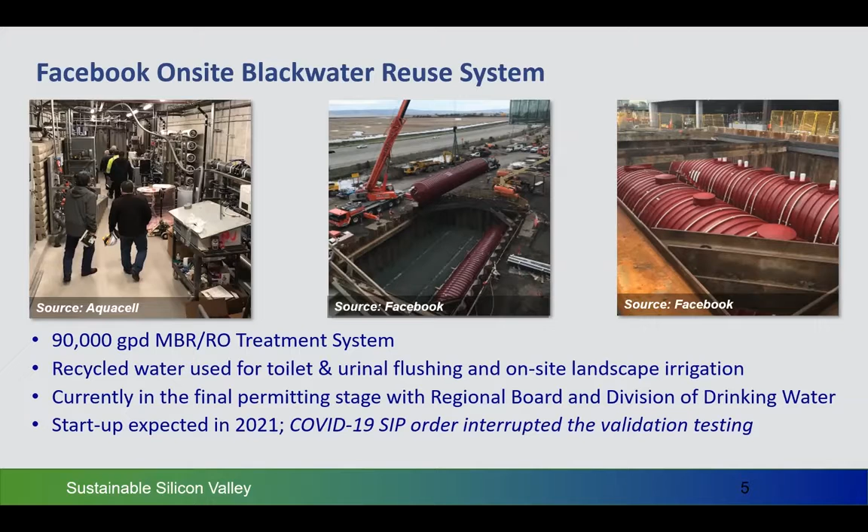I wanted to also illustrate the flow through this system. The wastewater comes from these two buildings, flows into the on-site reuse treatment plant, and about 68,000 gallons per day of recycled water is produced for on-site irrigation and toilet flushing.

The system also discharges a waste stream, which has to go somewhere, and in this case, back to the West Bay system. It includes a brine stream from the reverse osmosis process, because the salts become concentrated. There's waste sludge from the biological treatment process, and screenings, which come from things like wipes that get down into the sewer system, and that all has to be removed and go somewhere.

As I mentioned, when people are working on the design of these on-site systems, the waste discharge component can end up becoming a bit of an afterthought, because we're so focused on the water reuse component and all the LEED, green benefits and everything of these systems, that it can be overlooked in the early stages of development.

Also a point to note is that the waste streams from these treatment plants are different from the municipal sewage you'd find out in the public sewers, in that they are very concentrated, with high suspended solids, and in this case, high salinity and TDS due to the brine discharge. So they need to be looked at differently.

The other thing I'll share with you is that every sewer system is really unique, and some have more assimilative capacity than others, and some don't. You really don't know until you've evaluated the specific discharge and the point of discharge and taken a look at that. So that's why these need a permit.

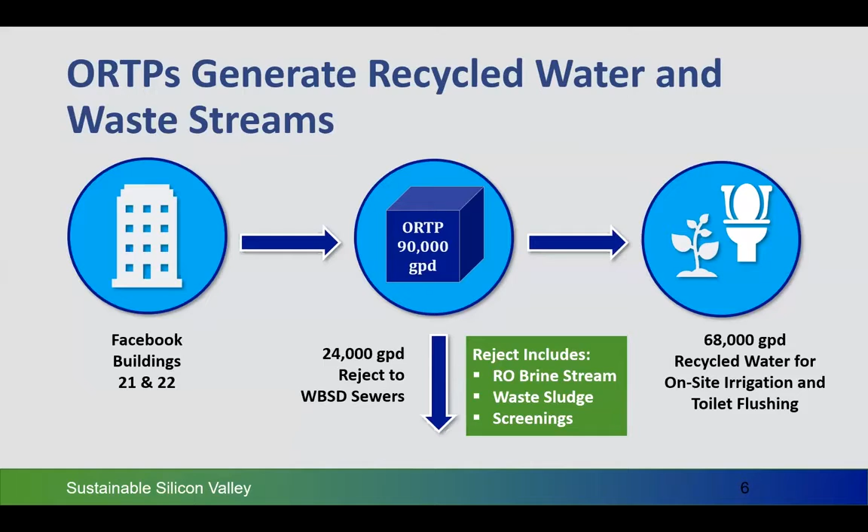West Bay had two main permitting concerns regarding the discharge. The first was salinity. West Bay was concerned about the high TDS because they are developing their own local recycled water system for the Bayfront area. They're going to be building their own recycled water treatment plant, which is going to be great. So it's important for them to also control the salinity, or salts, in the wastewater as well.

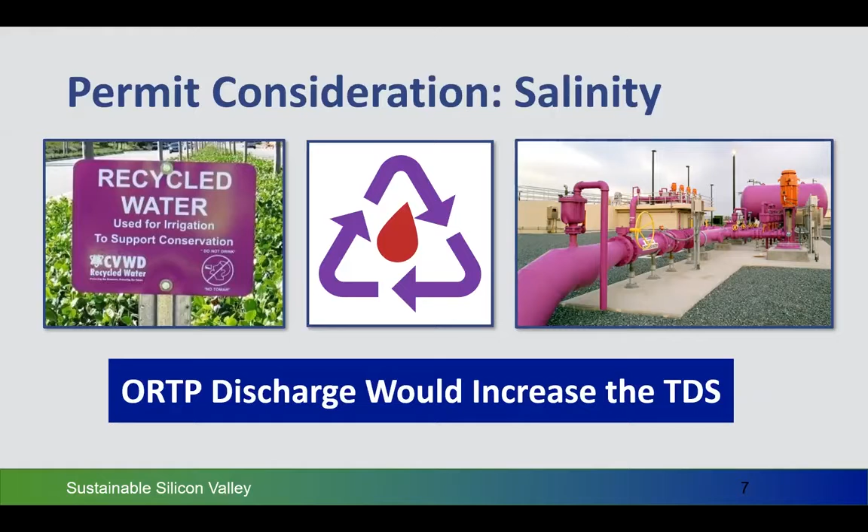Just like we know that too much salt is bad for plants, it's the same thing here. Also, independent of the recycled water concerns, high TDS in the discharge could potentially impact the downstream wastewater treatment plant, which is operated by Silicon Valley Clean Water, and that had to be evaluated as well. That's where the wastewater flows, by the way, from the West Bay system, to the Silicon Valley plant.

This illustrates with the numbers why TDS is a concern. The rule of thumb is you want your salinity for your irrigation water to be down around 450, or less than 450, to protect plants and landscaping. West Bay's average wastewater is already a bit elevated at 700 in their trunk line. And Facebook's discharge, which is a concentrated waste stream, is about 2,800 milligrams per liter of TDS.

In the future, with more of these systems coming online, you could imagine one may not necessarily be an issue, but if there's lots of them, then this needs to be looked at. Especially if the salt's being concentrated, it goes back into the wastewater system and has to be treated, or could increase the salinity of recycled water produced.

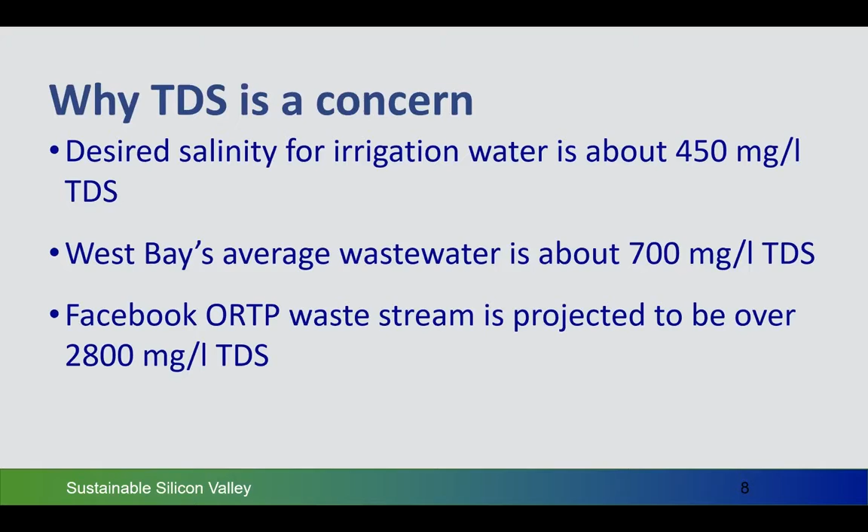A second concern is the impact of the concentrated solids and screenings on the sewer collection system. You can see in the middle here some pictures of pipes. Sometimes sewer lines get dips and sags, and solids that get into the system can collect there, leading to potential plugging or clogging of downstream pumps. That could lead to additional cleaning costs and maintenance expenses.

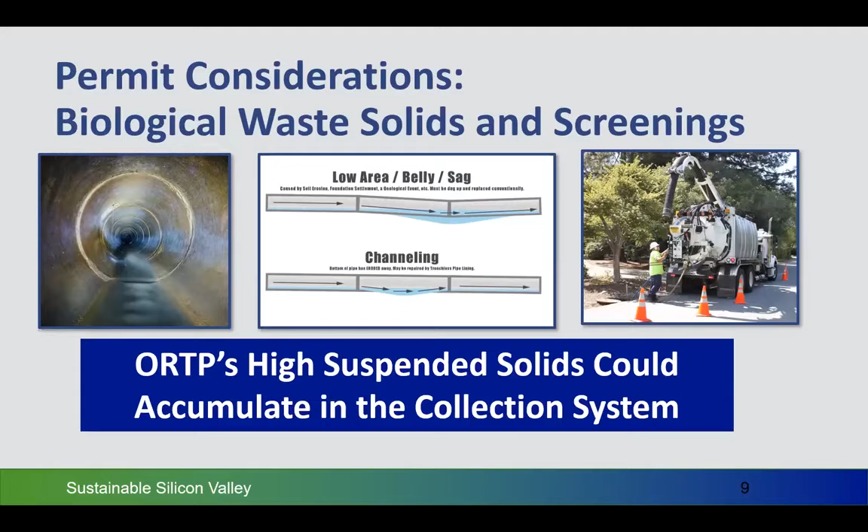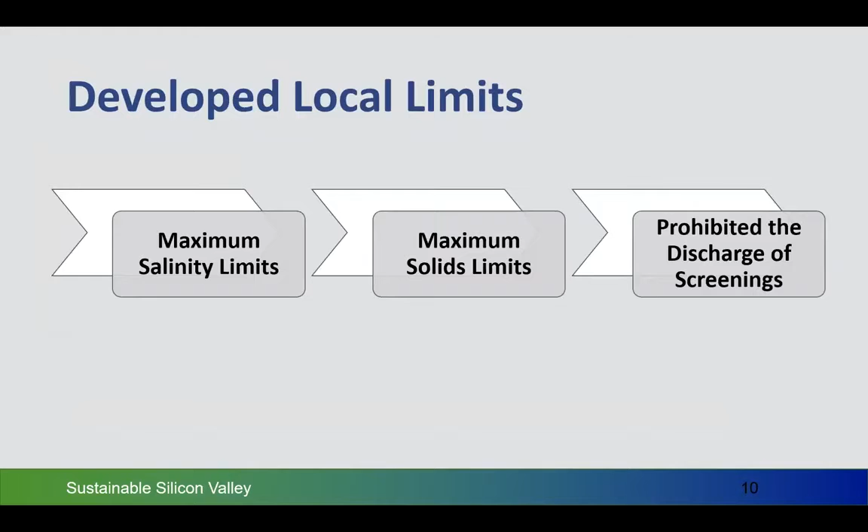So these were the two concerns: salinity and the biological solids. As a result, local limits were developed to protect the sewer system and the downstream wastewater treatment plant at Silicon Valley Clean Water. These limits included salinity and solids limits that would also prohibit the discharge of screenings.

The issue with that is these limits would require modifying Facebook's treatment system, which they had already started constructing, to meet the proposed more restrictive TDS limits and prohibit discharge of screenings. To do that, they would have had to install new process equipment and haul the screenings offsite for disposal at a landfill, which would be both expensive and disruptive, and additional costs that weren't included in Facebook's plans.

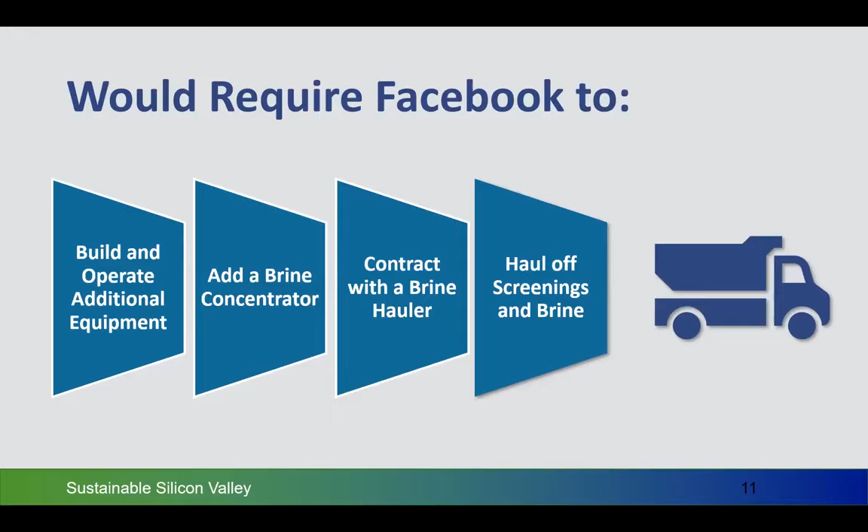As a result, the permit as originally proposed would create significant additional capital and operating costs for Facebook that weren't previously budgeted.

But there is a silver lining to the story. With all these issues at hand, the creative and problem-solving minds at West Bay and Facebook got together and came up with a novel permitting approach that was able to move the project forward. With that background, I want to turn it over to Phil Scott at this time to tell you more about the permitting approach and some of the lessons learned.

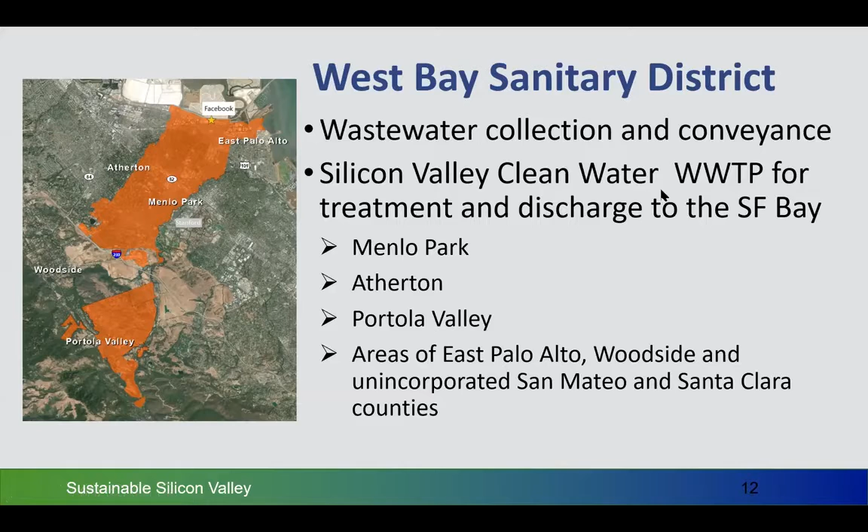So we were concerned about the salinity, like Don said. We were worried about the screenings. So what we ended up doing is working with them on a provisional permit that would allow a couple of variances to the screening requirement, as well as the salinity requirement. Over a period of 3 months, the provisional permit would be good for 3 months, and we would review it every 3 months and look at the data to see what their discharge is as far as salinity and the screenings, and also give us an opportunity to assess the downstream sewer line to see if the screenings are having any negative impact on loading of our sewer line going to the treatment plant, going to the pump station that then pumped it to the treatment plant.

So we were able to come up with this approach for Facebook because it's a new type of discharge. It's not routine. If we can go to the next slide there, Don.

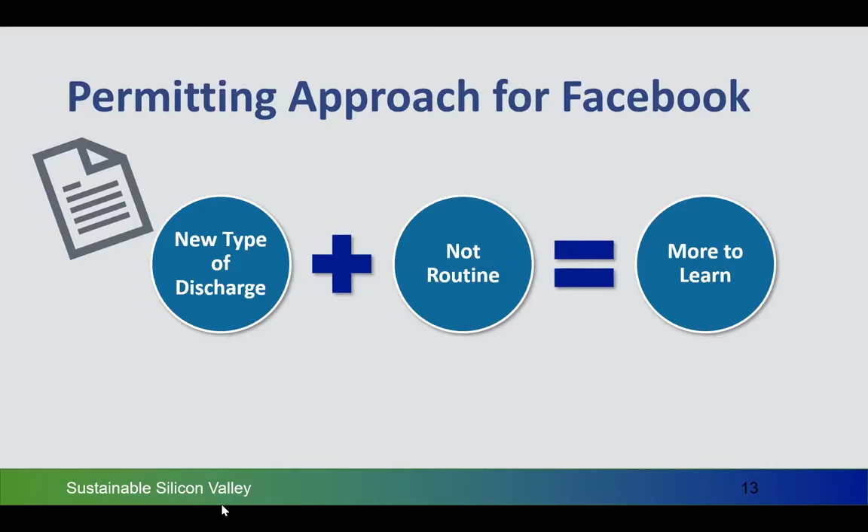Okay, why are we not... it's not moving. Yes, mine is up. There you go. There we go.

So as I mentioned, every 90 days we review the permit and see if conditions need to change, or if we need to stop the provisional permit, or if after enough data is collected, maybe we can continue on with the variance to the permit and issue a final permit at a later date. Next slide, please.

So the next steps for the Facebook project are they need to have the Regional Water Quality Control Board approve their on-site reuse treatment plant so they can become operational. And the COVID, as Don mentioned, kind of delayed some of that work. Then they'll be collecting water quality data and flow rate data for us.

Additionally, we had them install flow monitors that we can monitor through a website, so that we could have real-time flow information as well. They'll be submitting quarterly reports so we could look at the data, and then after 6 months we review the permit conditions and see where we need to go from that point.

Of course, they haven't started yet, so the commissioning and final permit we're expecting sometime in 2021. I'd tell you June, but I'd probably be wrong. Who knows how things are going to go for the next 6 to 9 months here as we're dealing with this COVID. Next slide there, Don, please.

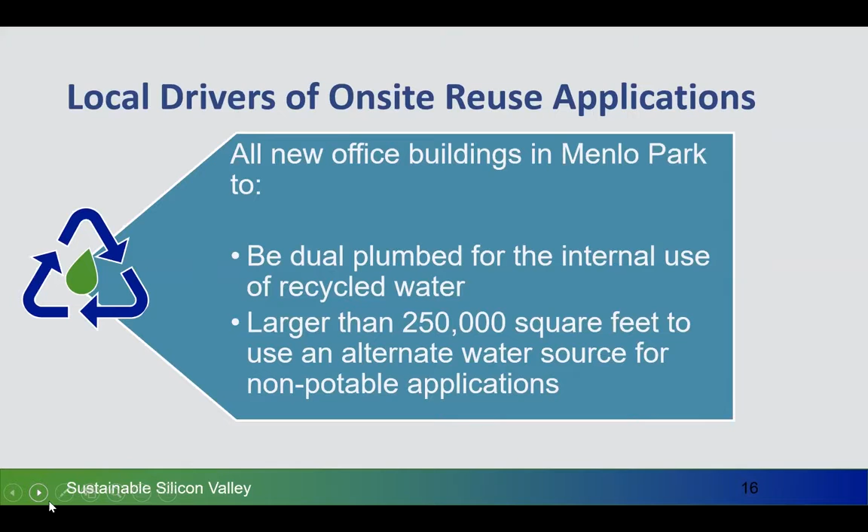So the biggest local driver for the on-site reuse application was the city of Menlo Park had asked that all buildings over 250,000 square feet use an alternate water source for non-potable applications. At that point, when they were designing the buildings, we didn't have a viable project online for recycled water in that area. The buildings were also required to be dual plumbed for internal use of recycled water. So Facebook decided to go ahead and move forward with the on-site reuse treatment plant. We did gain some valuable lessons from this permit application, but let's move on to the next slide, please.

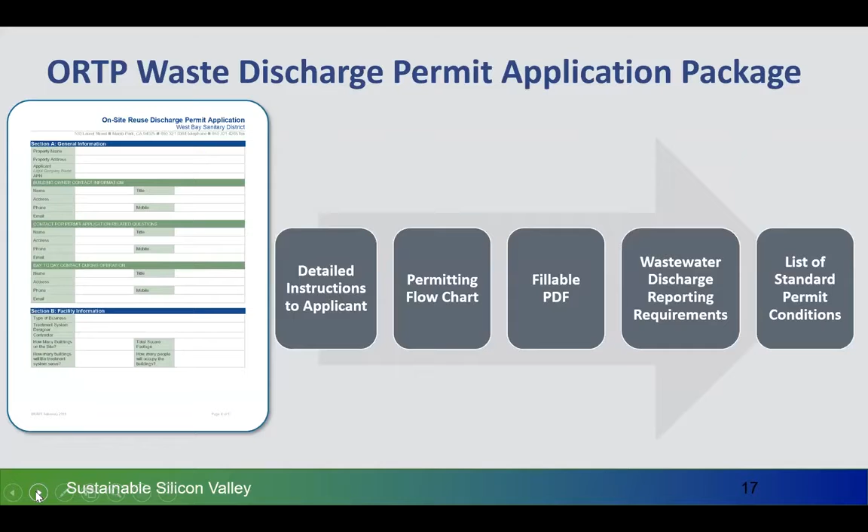One of the outcomes of this whole process is we had West Yost help us put together an on-site reuse treatment plant waste discharge permit application, because we had permit applications for many different things, but not for an on-site reuse treatment plant. So we were able to come up with a very comprehensive permit application that staff can use, that the permittee can use, and it'll help us out for not only this application, but for future applications.

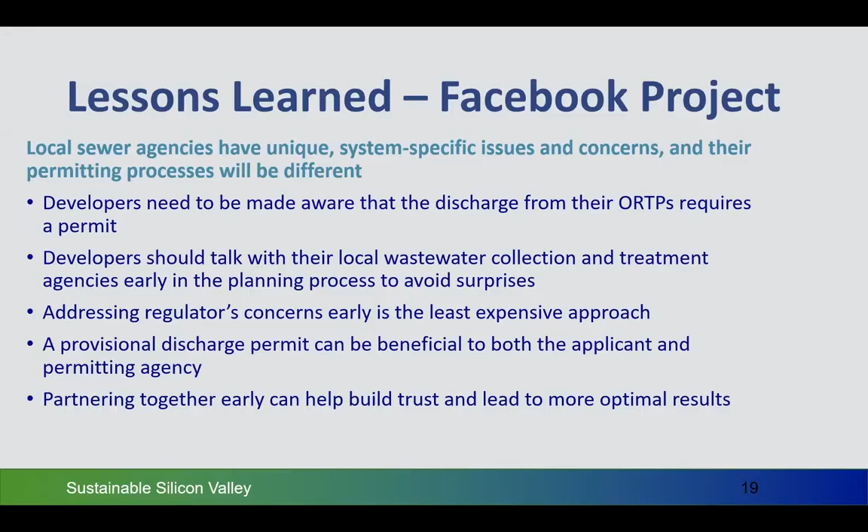So if that's it for this one, we're going to move on to the Sharon Heights talk, which Phil is going to present. I'm going to stop sharing. You got it, Dennis? I got it.

The Sharon Heights Golf and Country Club recycled water treatment plant is a little bit of a different story, in that we were trying to intercept wastewater up the hill and not pump it all the way down the hill, and provide the golf course recycled water that they could use in lieu of potable Hetch Hetchy water. They had a need to find a sustainable source of water in case there are droughts in the future, which we know in California there will be.

They were thinking that someday some governor's not going to let them use potable water for irrigating their golf course, and they wanted to be able to sustain their golf course. So we spoke with them and came up with a partnership, really, on putting together a treatment plant on their site that would intercept wastewater coming down the hill and recycle it for irrigation of their golf course. Next slide, please.

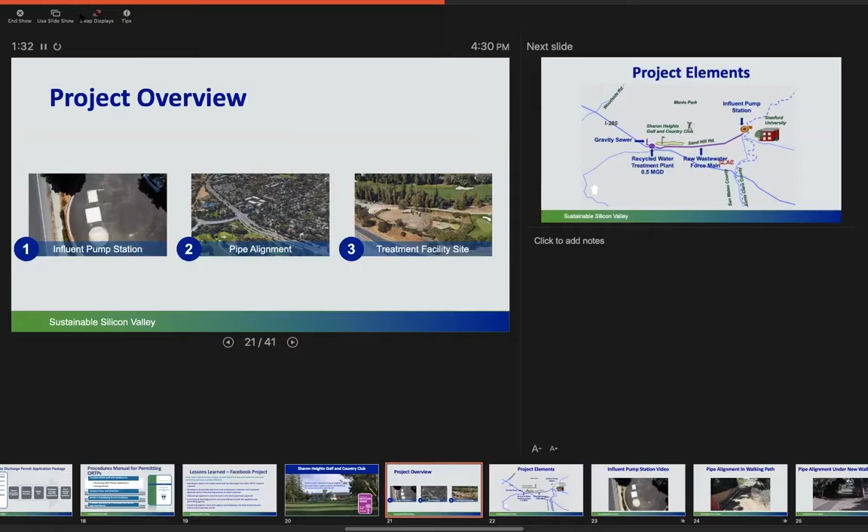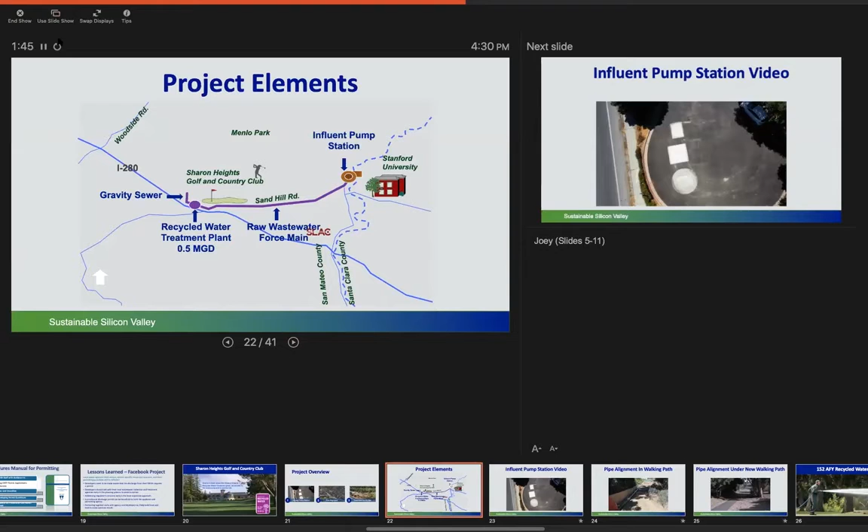The next slide shows these project elements in a map view. You can see the treatment plant on the left, where the recycled water treatment plant is about half an MGD in size, and it's located on the golf course. They're next to Sand Hill Road, bounded on one side by Sand Hill Road and another side by I-280. The influent pump station on the right takes the raw wastewater I mentioned and pumps it almost 2 miles up to the Sharon Heights Golf and Country Club treatment plant through the purple force main that's there along Sand Hill Road.

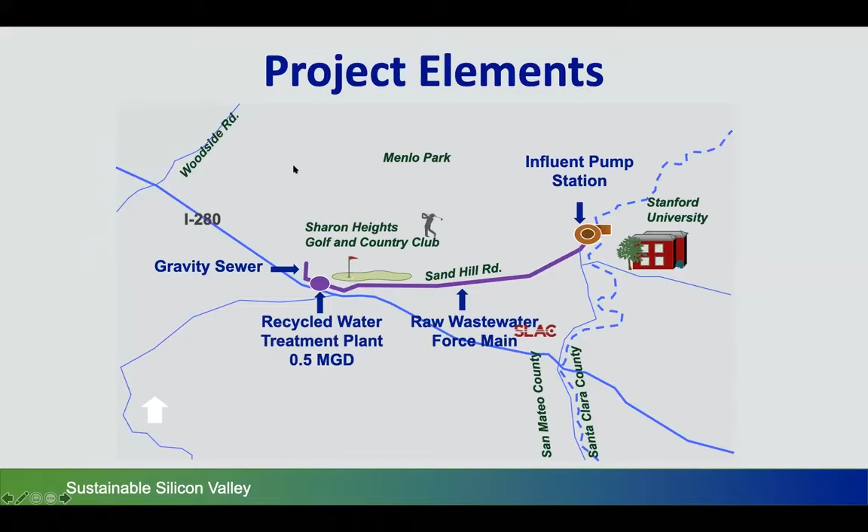The original project and encroachment permit that was applied for through the city of Menlo Park was to install the force main on Sand Hill Road. But on the next slide, we'll talk a little bit about the pump station, and we'll get back to the force main. But one of the neat things about this project, we did some drone videos, and I don't know if this will play here, but this is a quick little snippet.

But you can see the pump station is below grade, and all you see from the street is the vaults. And there is a control panel there on the side street island, not on the main street island, that we've since installed some shrubbery and painted it green to make it less visible and improve the aesthetics for the neighbors there. The nice thing about having the pump station underground is it didn't cause any problems with the street for the neighbors or parking.

The pump station consists of two 35 horsepower pumps and only needs one, but there's two so that it can have redundancy. But there is 265 feet of head that we need to overcome going up the hill. Yeah, and the next slide there shows the pipe alignment.

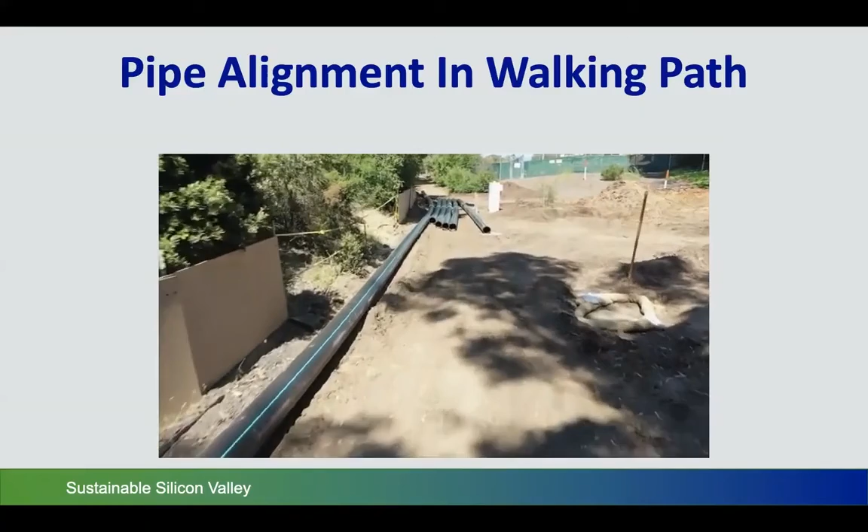So we had moved through the design build process that we were involved with. The value engineering portion of that really paid off in moving that pipeline out of Sand Hill Road and onto the walking path. There's a walking path that's parallel with Sand Hill Road. It is roughly the path we wanted to follow to get our raw wastewater pumped from downhill up to the top of the hill where the treatment plant was. By doing that, it took the impact of the construction off the traffic on Sand Hill Road.

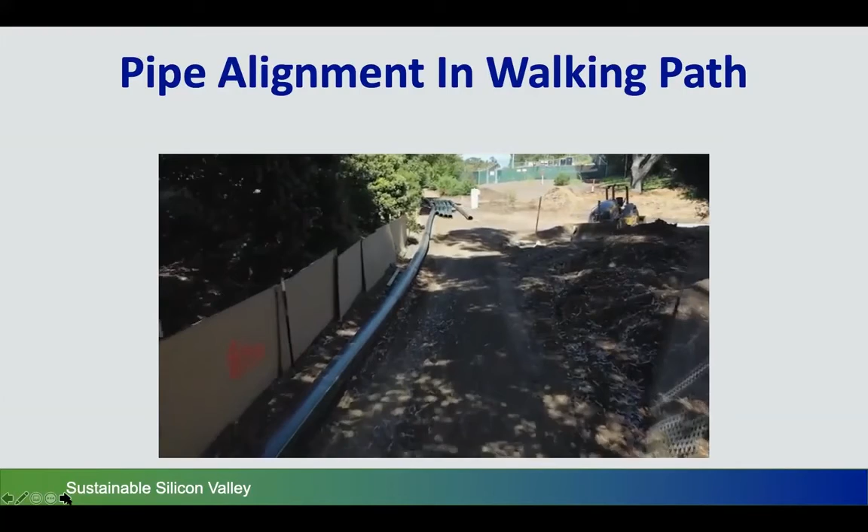And if we go to the next slide there, it also improved the walking path. The walking path was old and needed some repairs. And by us putting the pipeline there, we reconstructed the walking path, and it looks really nice. And it came out to be a benefit for the whole public and the project. And the city was delighted to mitigate the impact of the traffic.

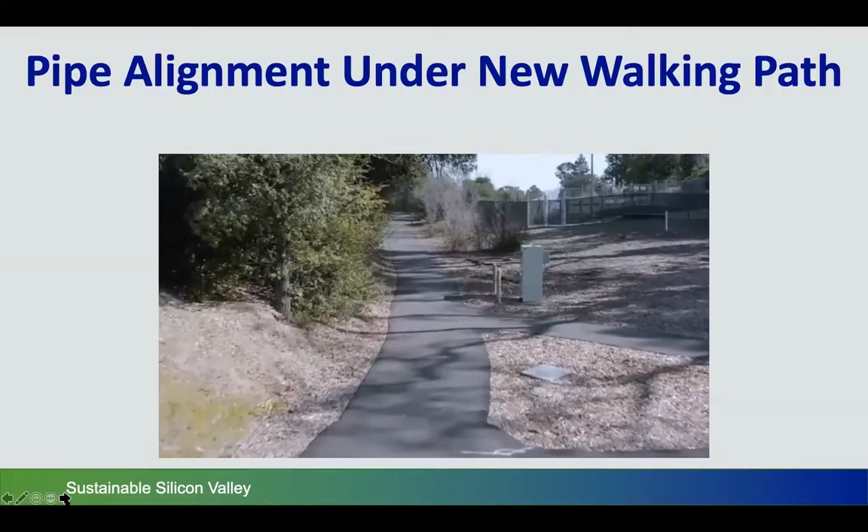All right, then the next slide just is a nice picture of recycled water being put on a golf course. So there's 50 million gallons a year that we're expecting to be able to produce with this recycled water plant. And we're targeting 400,000 gallons a day for the irrigation of the golf course during the summer. They actually use a little bit more than that, but we're pressed to get any more wastewater to be able to turn into recycled water in that area.

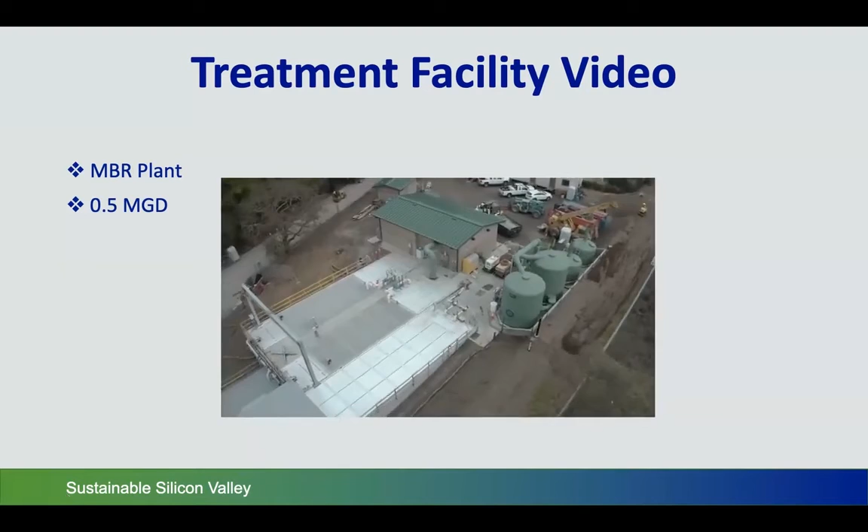But the treatment facility here is a membrane bioreactor plant, and we were able to use the slope of the location to produce a forward feed to reduce the reliance on pumping the wastewater from one process to another. We were able to use gravity. That helped reduce how many pumps we had to have, how much electricity we use. And again, as I mentioned, it's a 500,000 gallon plant. Turned out to be quiet and odorless, and actually pretty well screened from the golf course, especially with all those trees on the right side. We'll talk more about that.

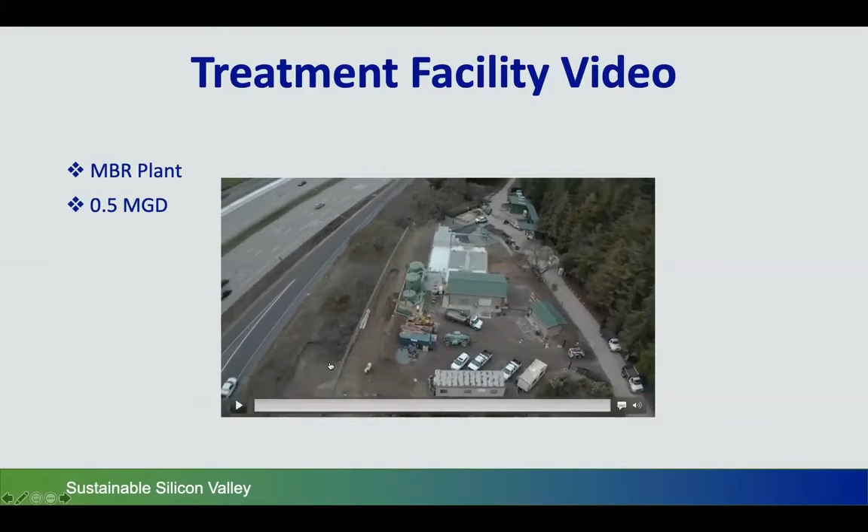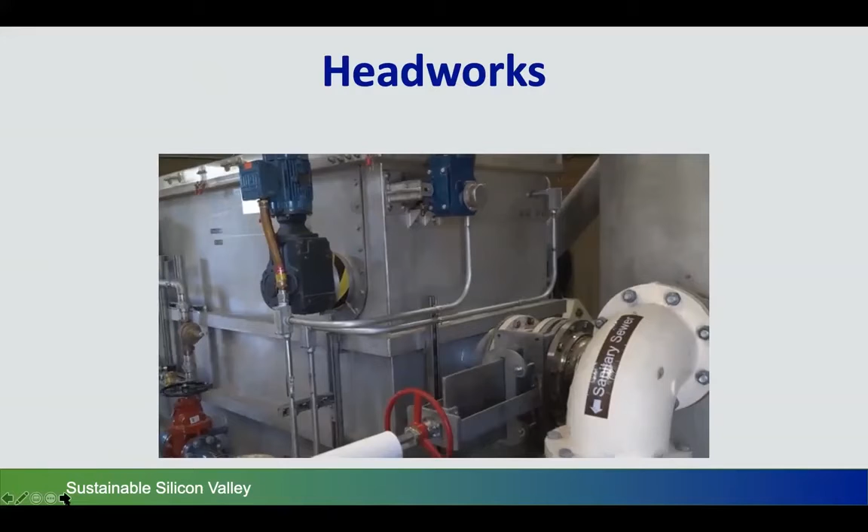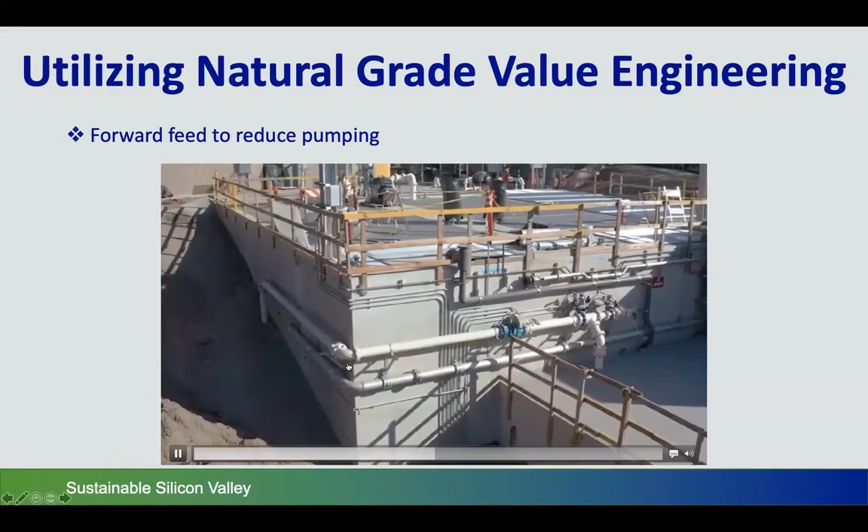The next slide shows the headworks where the raw wastewater enters the treatment plant. It's just a real quick video, but we also learned to use some of these videos from inside for training purposes for our chief plant operator. The next slide will show a little bit more detail about the slope. You could see the slope coming down there on the left side of the facility. And that helped us, as I mentioned, to be able to use the forward feed to reduce the pumping. So that was one of the benefits of value engineering in the design build project.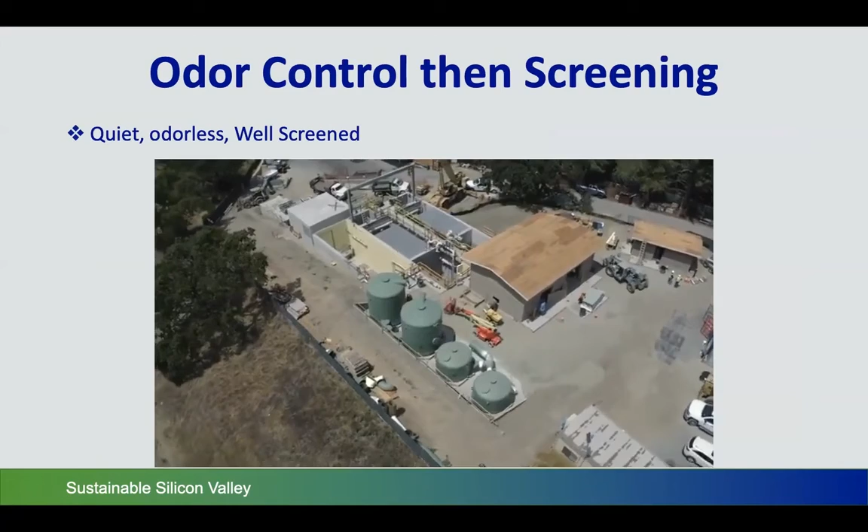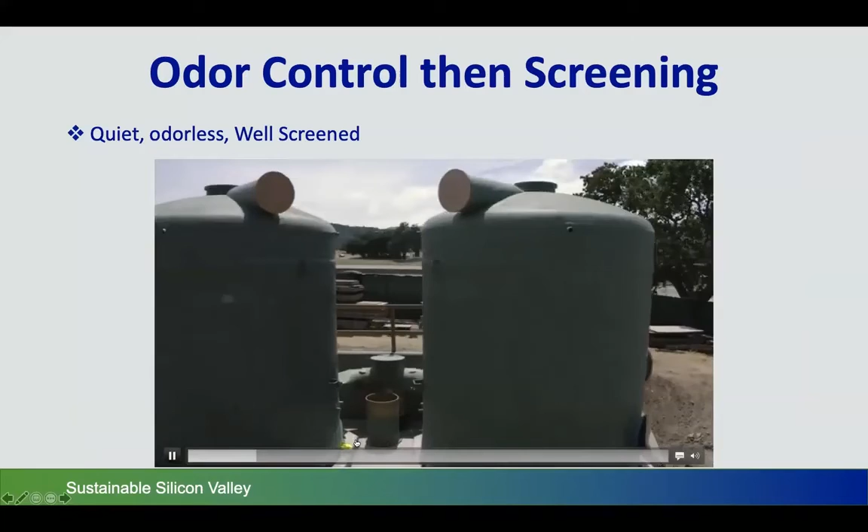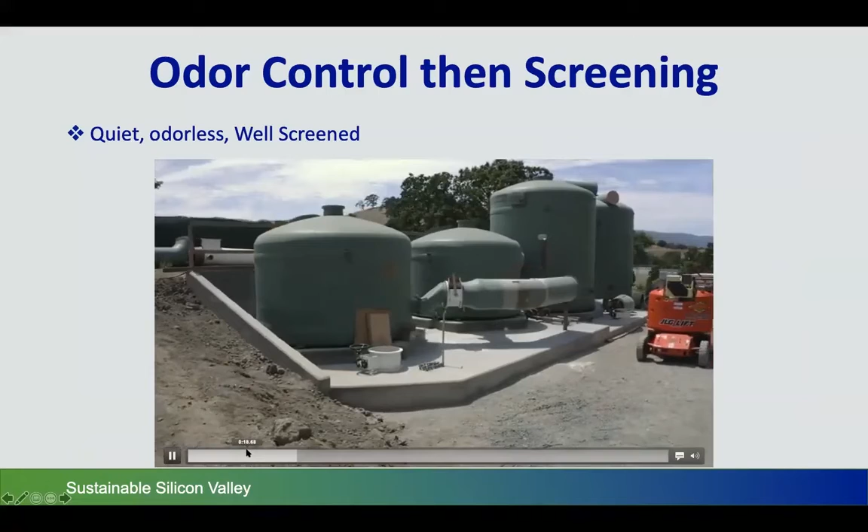The large tanks are the bio-trickling filters, and they do the bulk of the heavy lifting to reduce the odors and mitigate any odors that might emit from the treatment plant. And as a backup, as a redundancy, we installed the activated carbon smaller tanks there. And they've not even been used yet. But in the case that it gets overwhelmed or overwhelms the biotrickling filters, those activated carbon tanks can take over.

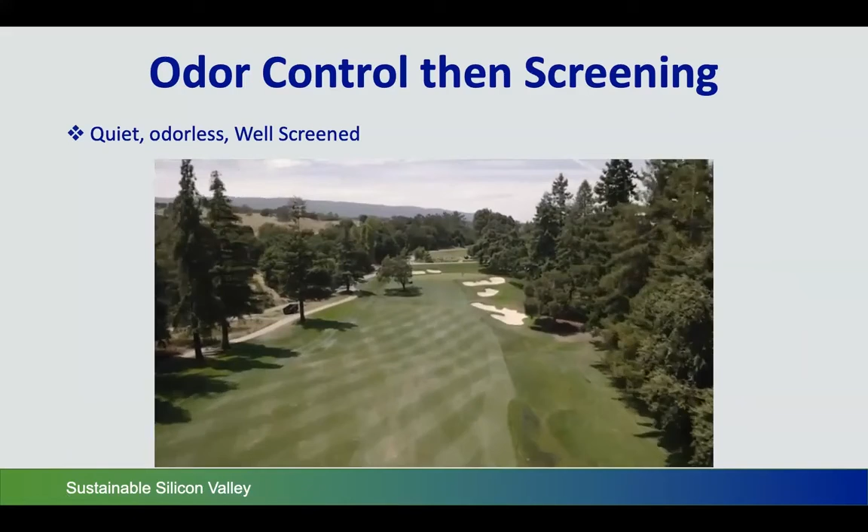This is just a drone shot of the golf course. And on the left side, it'll show how well the treatment plant is screened from the golf course. You can see through, this is during construction, so there's a lot more trucks there during construction than while it's operating. And we also installed fencing.

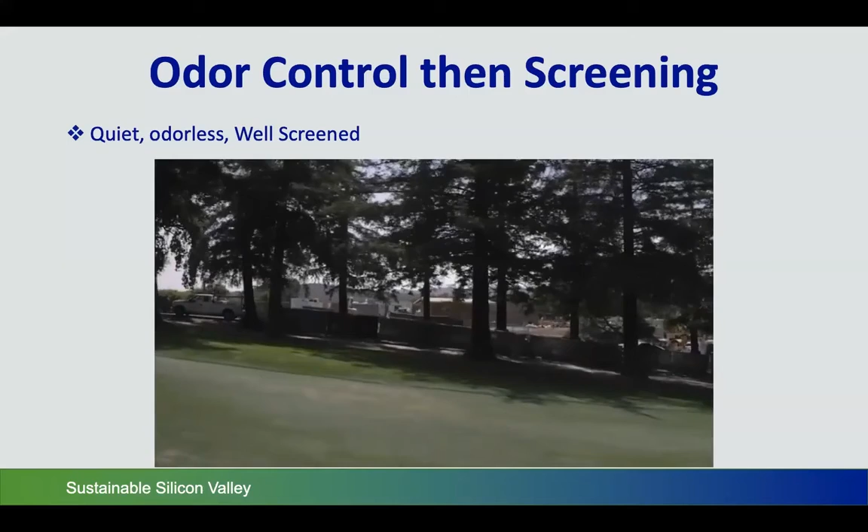If we can go to the next slide there, interrupt this video, please. So we installed some fencing and of course some landscaping that, as it matures and grows, will do a better job even of screening the facility.

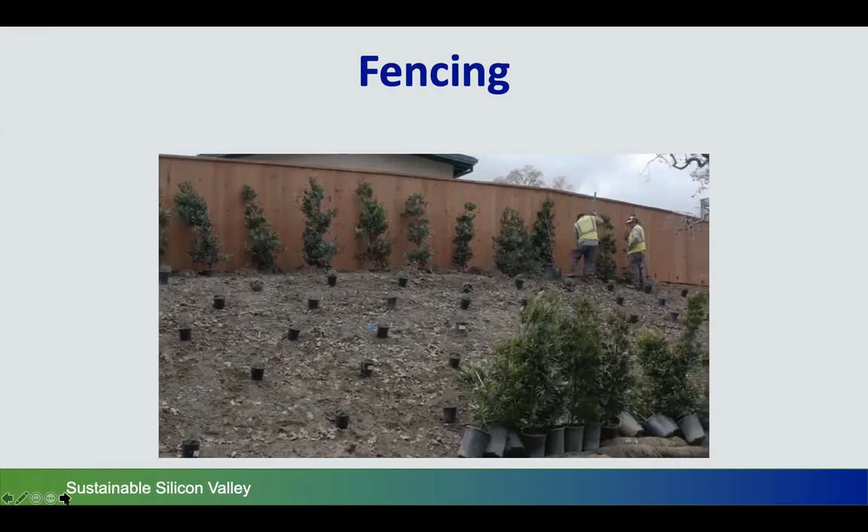Okay, the next slide will show the ultraviolet disinfection units. So there's two there. It runs on one, but we need a redundant system. And I think there's 32 bulbs inside there that disinfect the recycled water that then from here goes out to the golf course pond, and where they pump it onto their facility.

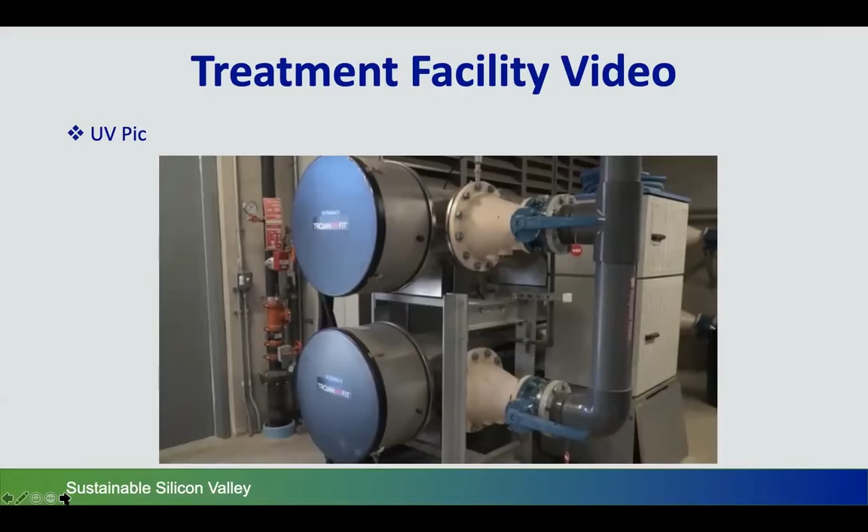The next slide, we'll talk about the public-private partnership. I think it jumped ahead a few slides. So the district worked with Sharon Heights to develop a long-term agreement. There we go. Whereby the district would fund the project, and we got SRF loans, state revolving fund loans, and we even got 5.2 million of a $22 million project as grant. But the long-term agreement commits the Sharon Heights Golf Course to pay us back for the capital expenses. It also requires that they pay the annual O&M for operating and maintaining the treatment plant.

As I mentioned, we were able to secure a state revolving fund loan at 1%, and 5.2 million of the 22.5 million was grant. It was a progressive design build project, and in a few more slides, we'll talk about the Caltrans fill station and some of the negotiations that had to go on for that. So, as I mentioned, the project price was 22.5, a little over. The project had been completed, and we actually came in about $300,000 under budget. As I mentioned, it was 1% interest, 5.2 million of the 22.5 was grant, and we operated on 5% contingency, which is actually a pretty small contingency on a project of this size.

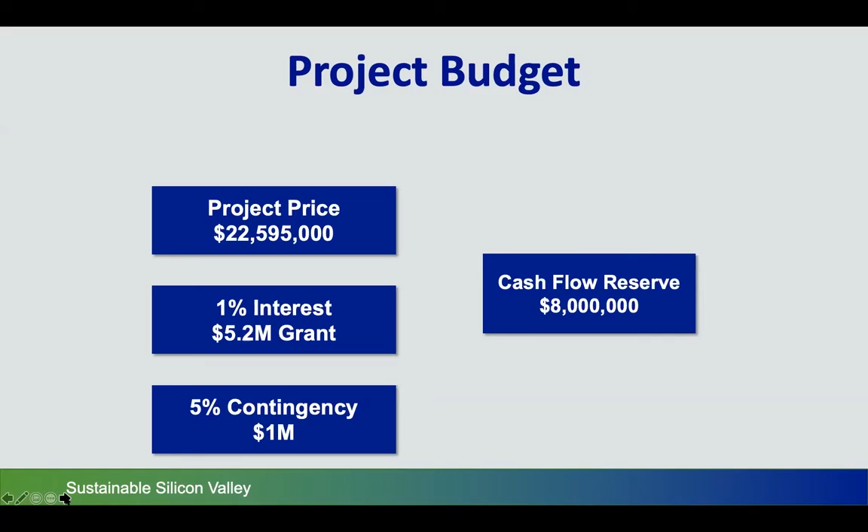The district had to commit to $8 million of cash flow reserve to be able to pay the contractor as the project went on. But in the long-term agreement, we also had provision for the golf course. If we exceeded that $8 million cash flow reserve, if we weren't getting our reimbursements back from the state quick enough, they would have to participate in the cash flow to be able to keep the project going and get it done on time. All right, next slide, please.

So the Caltrans permit. When we moved the pipe alignment off of Sand Hill Road and we put it in the walking path, then we found ourselves needing to use the Caltrans right of way for our pipe alignment to go through rather than just straight across. That consisted of a longitudinal variance from their encroachment permit. That took 18 months for us to acquire. So that was a lesson learned, but it did still help the value of the project. It reduced the cost of the pipeline, the force main pipeline, and it also mitigated almost all the impact to traffic on Sand Hill Road. So it was still worth it.

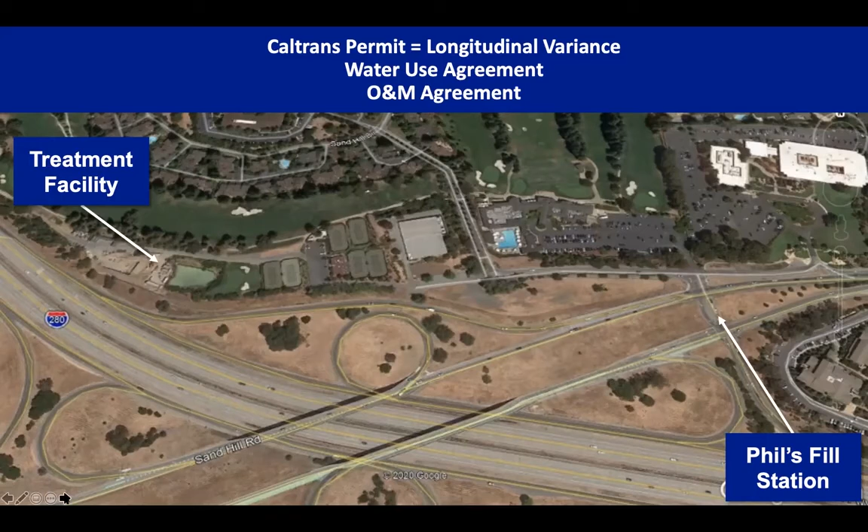We were able to work on the treatment plant itself and the other parts of the force main while we were waiting to get that permit. We got it just in time to go ahead and move the construction along without hardly any delay at all. And it worked out good. The only thing that Caltrans asked for was they wanted a fill station where it says Phil's Fill Station. They named it Phil's Fill Station. So Caltrans could have their street sweepers plug in there and get recycled water to do the street sweeping on the freeway. Okay, so I know we're running out of time, so we'll get moving ahead real quick.

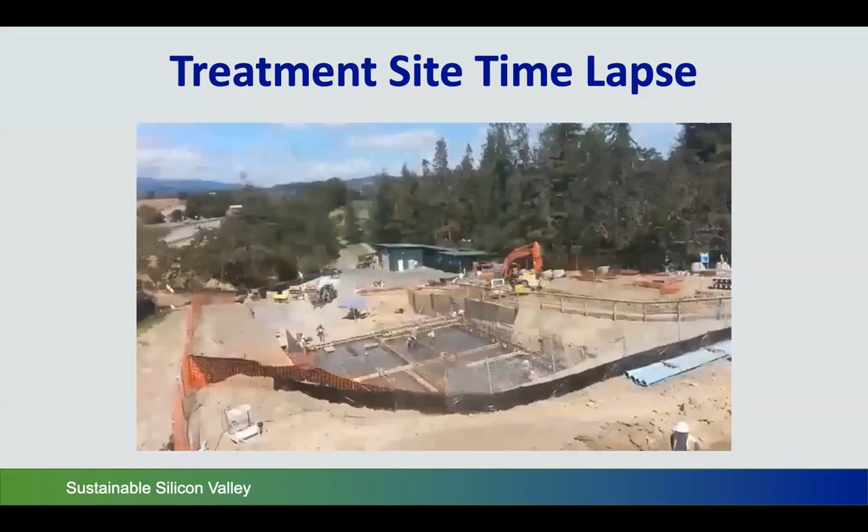This is a time-lapse photography. We had a camera posted at the site so we could document all the construction activities. But it gets really long on a long project like that, and it gets hard to find a particular point in time where you're looking for a certain portion of the construction.

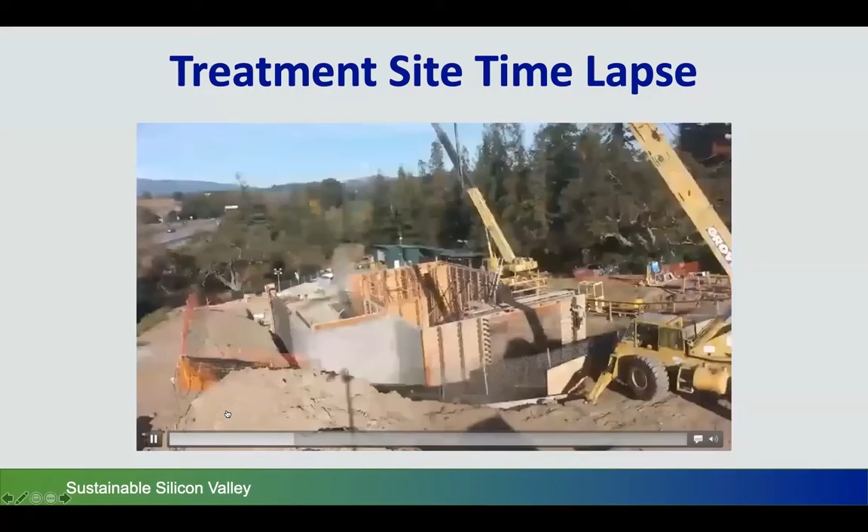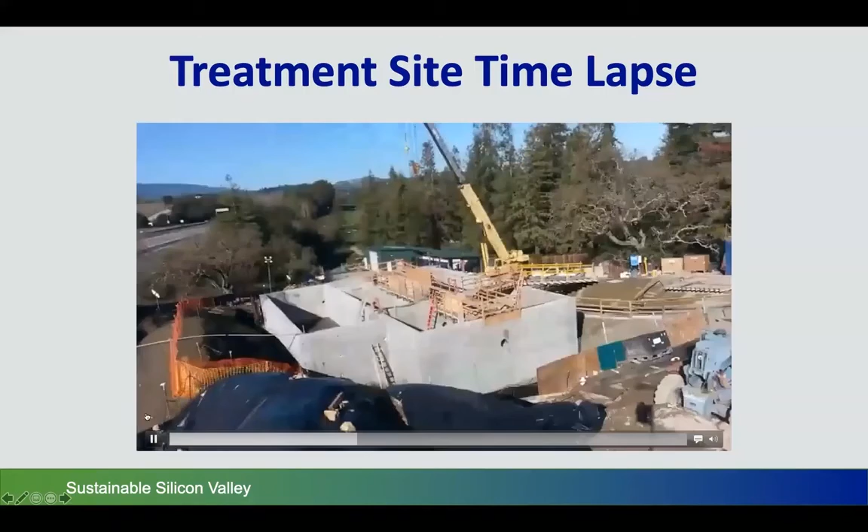But you can kind of get the gist of the work that was done. They dug the hole, they put in the forms, and they poured the concrete, and then eventually you get to the ground level and you start building the operations building, the headworks. All those kinds of things. And so this was good.

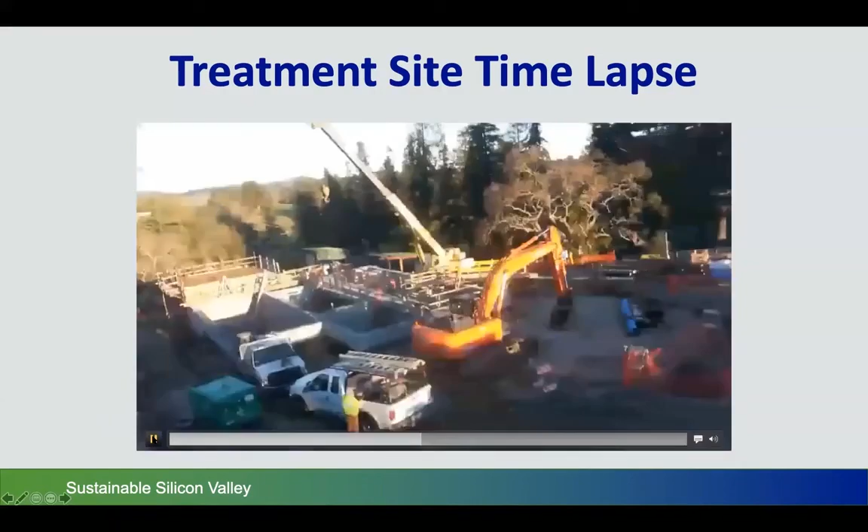It was helpful. However, we discovered that drone videos could give us a unique perspective, and we can move it around. Whereas with the time-lapse photography, we're kind of stuck in one point. But that's good and bad. But anyway, if we can forward to the next slide there.

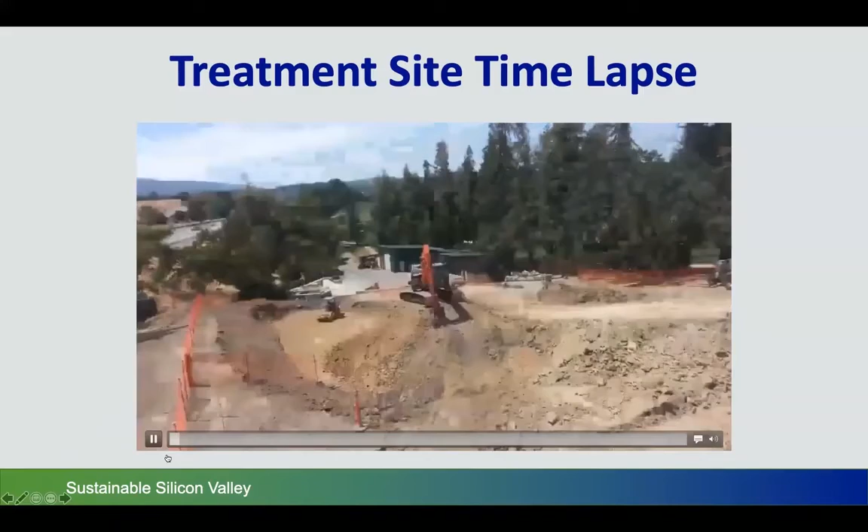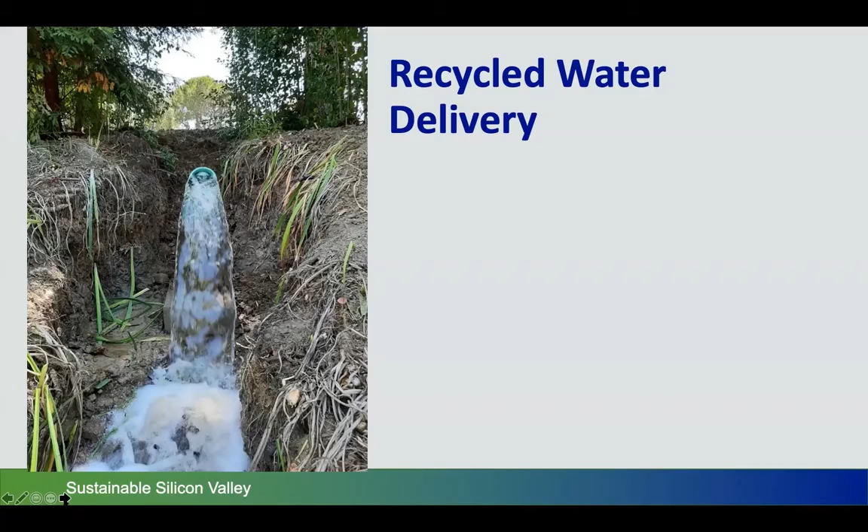And the next slide shows that we've actually delivered recycled water to the Sharon Heights golf course. We began delivering on July 27th, and I think we've delivered about 19 million gallons to date. And in 2021, we're hoping that'll grow to over 50 million gallons. So, lessons learned.

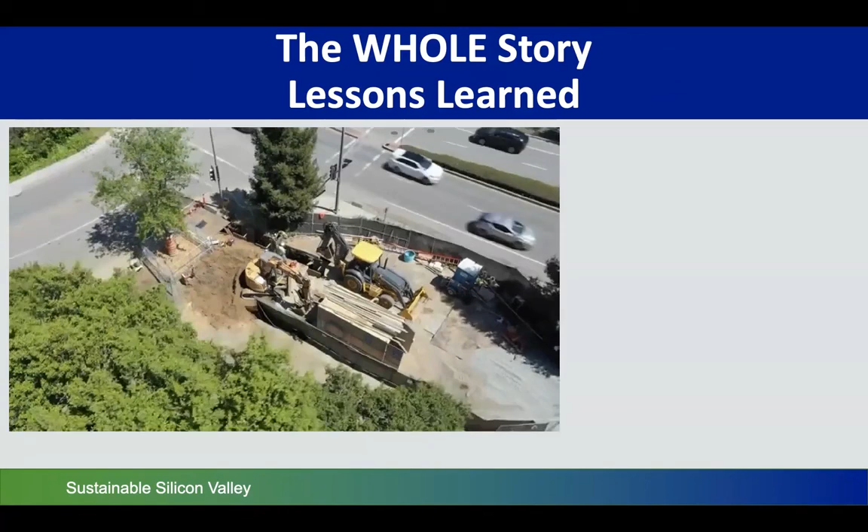The Caltrans permit is something we didn't anticipate. While this video runs, I'll talk about some of the lessons learned. But it did provide us with great value, and so it was definitely worth it. It took a lot longer than what we expected, but because the design-build engineers and contractors put their heads together, they decided they could do a lot of the construction while we were waiting on that permit.

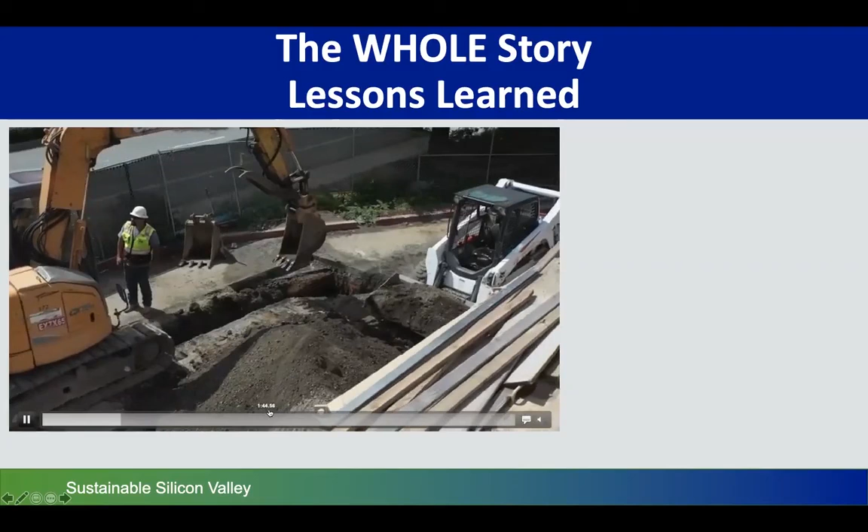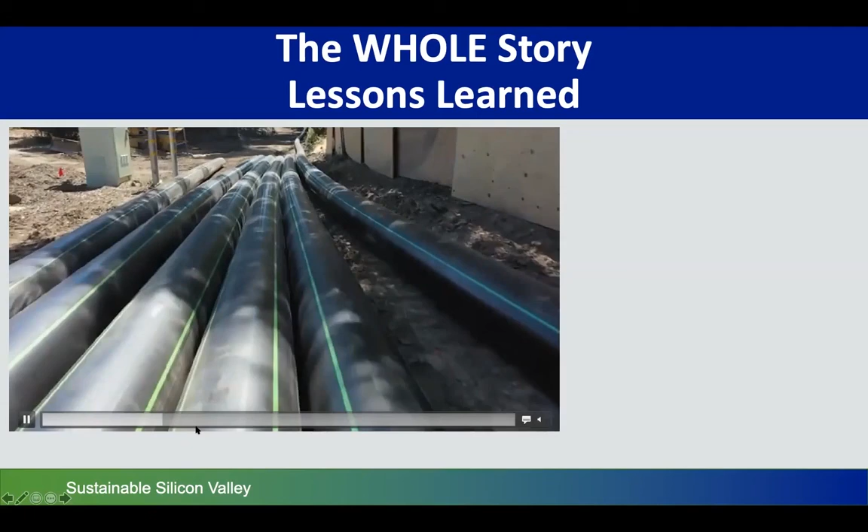Wipes became a problem. We didn't anticipate the wipes being a problem at that treatment plant, but because of COVID, as soon as we started doing our testing, everybody was using wipes instead of toilet paper because they were running out of toilet paper, all that stuff. So we used YouTube and Facebook ads to target zip codes, and newspaper articles and everything else, to convince the public to discontinue the use of the wipes because it was causing problems at the treatment plant, and they responded very heroically. It was a terrific success story in public outreach.

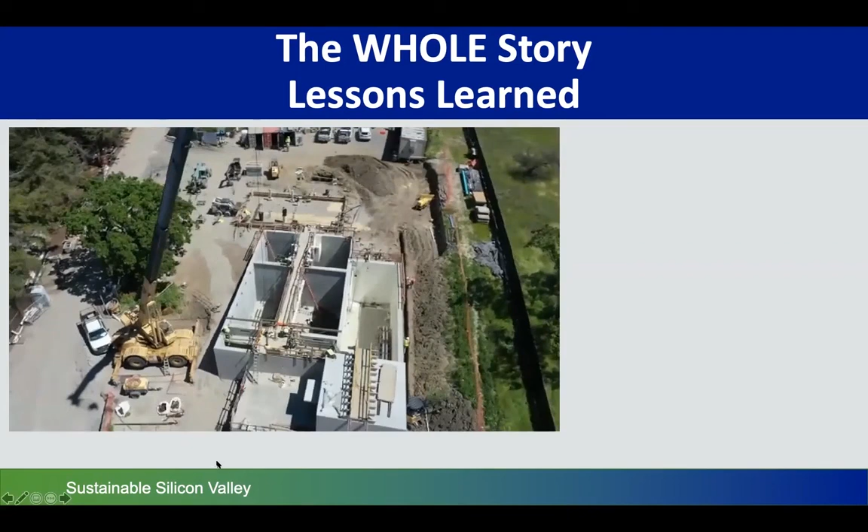We ended up modifying the screening a little bit to adapt to some of those wipes and some of the other debris and grit that was coming to us. COVID-19 was a lesson learned. I'm not sure we'll ever have to use that again.

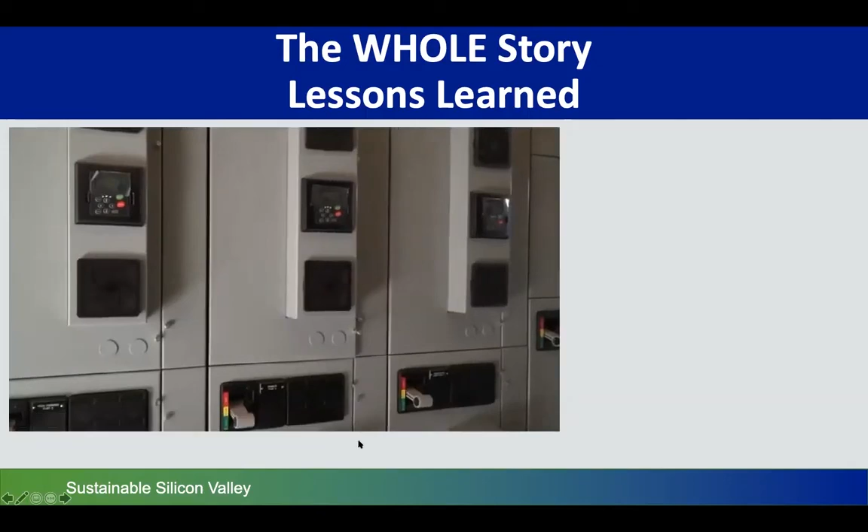I hope we don't. But the public-private partnership was a huge benefit, in that we were able to take what was considered a waste in the past and turn it into a resource for the benefit of the whole community. So now the whole city of Menlo Park benefits from having the potable water used for the citizens rather than for irrigation of a golf course.

A bioassay was something we learned we had to do. We thought recycled water on a golf course wouldn't require a bioassay, but it does indeed, because the source is wastewater, not lake water or something a little cleaner. We learned to talk to regulators early and start our Title 22 a little bit earlier than we did. We got it all done, but there was a little bit of pressure there.

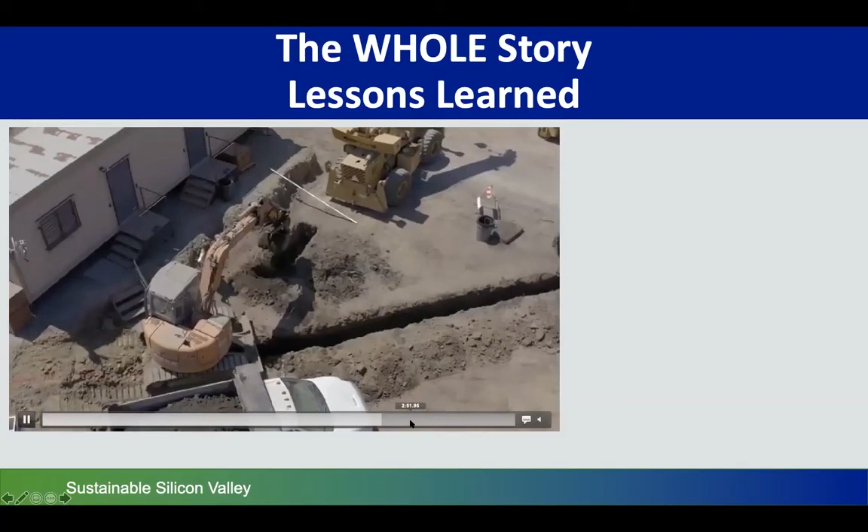We also learned that borrowing money from the state and getting grants from EPA requires a disclaimer that you have to use for all your public outreach, any brochures, any advertisements, and even in your presentations. So in this presentation, you will see a disclaimer that says this project was funded in part or all by state and federal funds. And those are some of the things we had to do.

And we learned that drone video is super helpful, super cool, and really helps you tell a great story, not only for this project, but I'm imagining you could use it for all kinds of other projects. We used drone video to go to the Army Corps of Engineers and show them the site where we're going to put another recycled water facility down on Bayfront, and they decided that they were going to make that a requirement for all applications in the future. So I don't know if that's a good thing or a bad thing we did, but anyway, those are some lessons learned.

Here are some of our partners, and then of course Summit Aerial is the folks who put this video together. All right, with that, I think that sums it up for us.